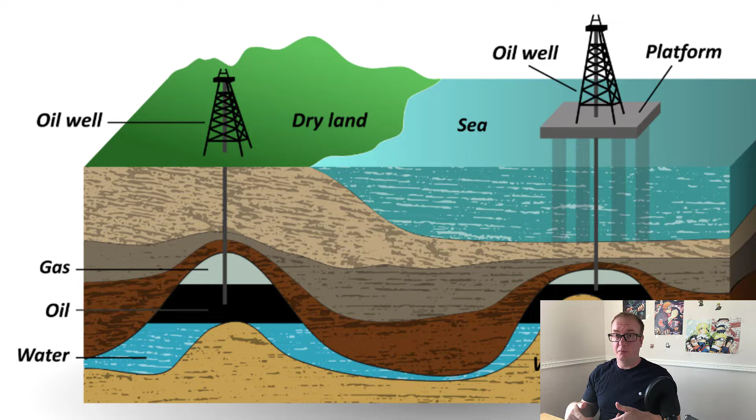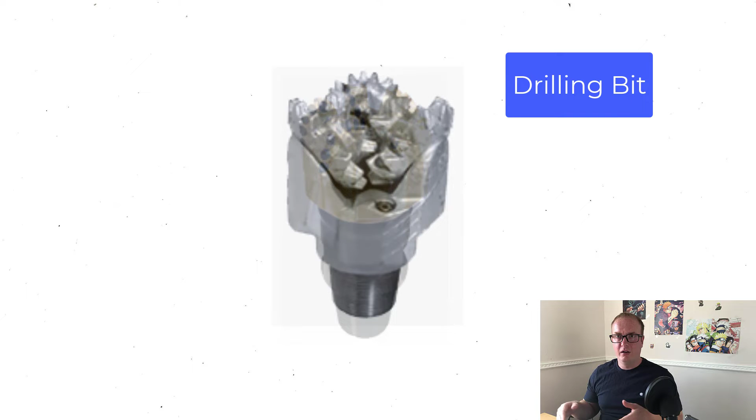So this is a rig, and basically you've got some pipe that you run into the hole, down to the bottom of the seabed, and then you rotate it. Essentially what you're doing is using something solid called a bit at the bottom to cut up the ground, and then it brings the ground and solids back to surface, creating a hole all the way down to total depth, TD, which is an abbreviation for total depth.

And once you get to total depth, at that point you can run your completion, and your completion helps facilitate getting oil, gas, or water out of the hole.

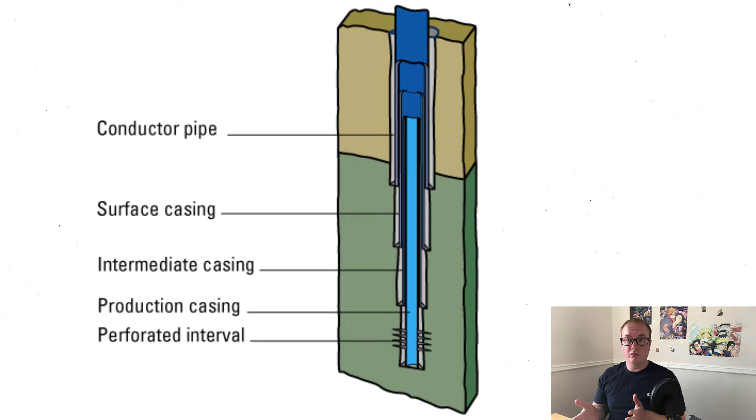So now we have the actual design, the schematic of how we intend to do so. Here you see we've got a conductor pipe, which is the first section. You drill a big, large 30-inch, 28-inch hole all the way down maybe a couple hundred meters or feet, and you run a circular piece of steel with a hole in it down to the bottom of where you've just drilled. And that's your conductor. That supports your foundation.

So once you've supported your foundation, you know it's not going to collapse on you. You can go to the next section, and there you see we've got surface casing. Do it again: drill, pull out of hole, run a steel casing down.

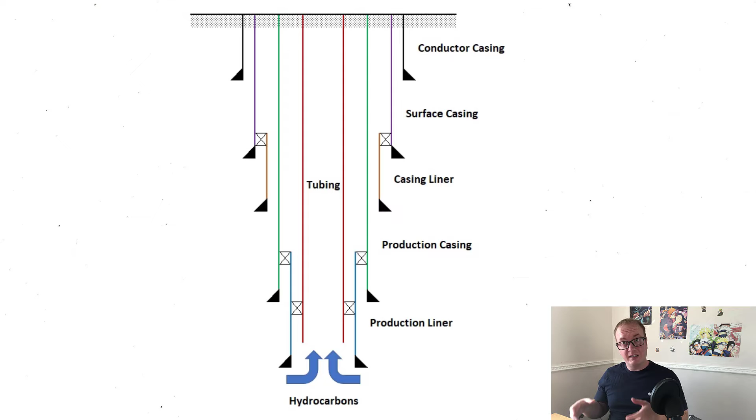At that point you're going to be cementing. So behind each of the casings you put cement to keep it solid so it doesn't move. Then again the next section further down could be 1,000 meters, 2,000 meters. That's the intermediate section, and you drill again after that for production casing.

And then you've got the point at which you're either open hole or perforating, essentially creating holes in your casing to allow the oil, gas, or water to come up to surface through your tubing or casing. And that's essentially the design or configuration of what an oil and gas well looks like downhole.

In order to get your solids, or as they say cuttings in the oil and gas industry, out of the hole when you're drilling, you need some kind of conduit or mechanism to move that to surface.

And we use a fluid, what we call drilling mud, and this fluid mixes up with the solids and brings it back to surface. At surface you've got your shakers which help filter out the solids, so then you can use that fluid again, put it down the hole through the middle, and then come back up into the backside, or the annulus as we call it, bringing the solids back to surface. You keep doing that, and that continuous mixing of fluid and cuttings brings it to surface.

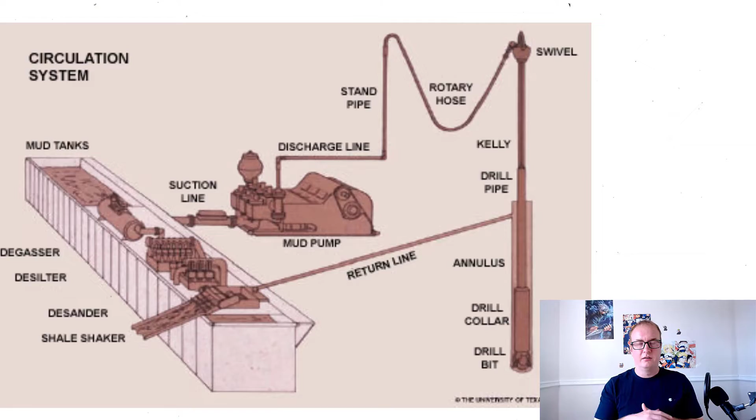So as I said, it's made up of pieces of pipe that you run in hole, but at the bottom you've got an assembly specially designed with some kind of mechanism to move the BHA at certain points along your well path when drilling, because they're not always going to be vertically straight down. They'll be directional or even horizontal when you get down to further and deeper depths.

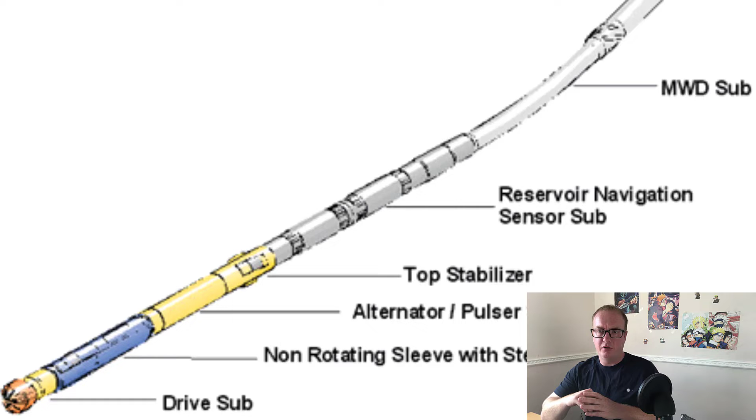So at this point we've got certain pieces of equipment such as non-rotating sleeves. You've got stabilizers, sensor subs, and MWD, which is measure while drilling subs. It tells you where you are in terms of geographical location relative to the bit, which is the drilling bit. We've got jars, which help with jarring in certain instances to make sure you don't get hung up or stuck. And there are all different sizes for this configuration or design, depending on the way your well needs to be drilled, the sizes of the hole, and the equipment you put inside of it.

So that was a part of drilling, and then we move over to completions, where what we do is put in certain pieces of equipment once we've got nice casings in hole and we've cemented them, everything's hunky-dory, and at that point we want to have a nice conduit through which the oil, the gas or the water comes up. When you say why water, it's because 99% of the wells in the world will experience water coming with the oil and gas at the same time, which you don't want.

But in an oil and gas producer, you kind of know that you're going to be expecting water. Now if you start off with 1%, 2% to 5% water cut, that's fine, and it's only when you start to experience higher water cuts than that, the well starts to become uneconomical to run.

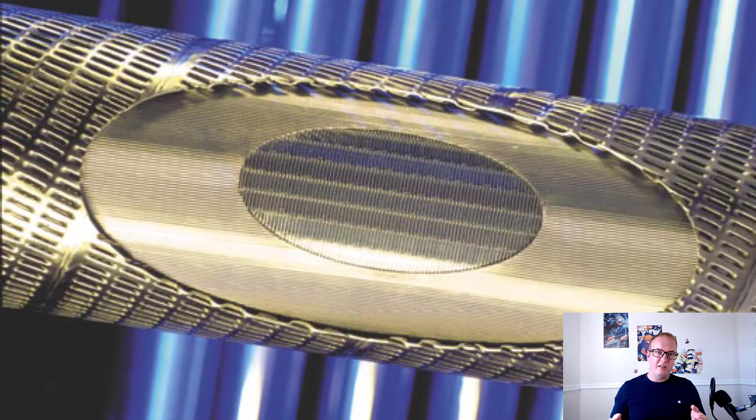So here you see we've got production tubing. You start with the lower one, the deeper one obviously, it's called the lower completion, and on that you've got screens, and screens are just to mitigate the hole from collapsing and the finer solids from getting into the actual well, which can cause damage and blockage, etc.

You can put screens in on their own, or you can do gravel packing, which is putting certain solids on the outside of these screens to prevent the solids migrating or having the ability to move. It just keeps it solid.

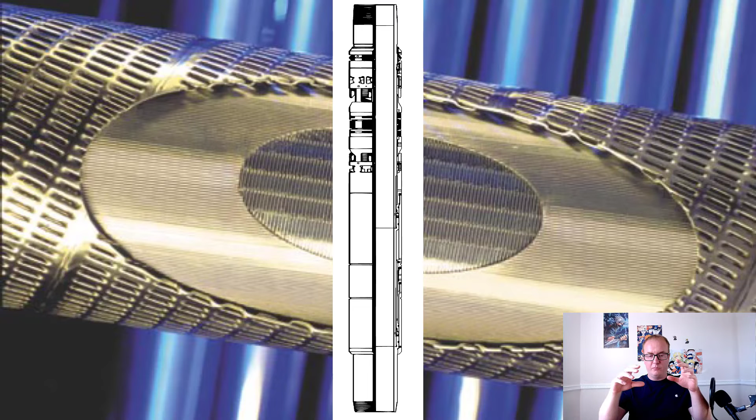And then above that you've got your packer, and it says a screen hanger, your hanger packer, and that's to hang off on the casing. And then below that you've got your lower completion hung off on your casing via this hanger, which is very important. There's a lot of forces acting upon this packer, so we need to make sure it's suitably designed.

And above that it's called your upper completion, and that's where you run in. So you run in with the first one, lower completion, you run in with the second one, and that's your upper completion. Now the upper completion has a lot of different components in it to help facilitate the oil, gas and water coming up into the upper completion.

And here we've got obviously the tubing, you've got the downhole safety valve, which is a super critical safety component that if for whatever reason there was some kind of high pressure coming up that you couldn't control at surface, at that point you can close it, or it would close on its own to prevent that. So that's your final barrier, if you will, in the well.

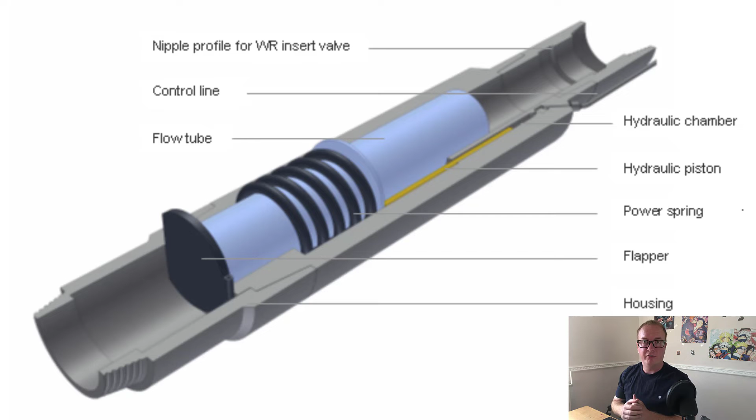You've got your production packer, which again, same as the lower completion packer, there's different forces acting on it, which is critical to make sure that your barriers are in place. Because barriers are really important in the drilling and completion world, where we always need to have at least 2 barriers in the well to prevent any kind of oil, gas or water coming up and causing a blowout.

And at that point we've got the downhole pressure gauge, the DHPG, which helps to facilitate monitoring the tubing for temperatures and pressures downhole. You want to understand what's actually happening down there, and in some instances you could have certain kinds of artificial lifts, such as ESPs, electrical submersible pumps, that we use to help facilitate the production of the wells by reducing the head. We'll go into the super details later, but this is just for the basics.

So that's pretty much it. You drill each of the sections: conductor, intermediate casing, production casing. You cement it, you come down to your depth. You've got a lower completion that you run in to help stop the solids from coming to surface. You've got the upper completion to help facilitate safety or the actual production by reducing the head, as I mentioned.